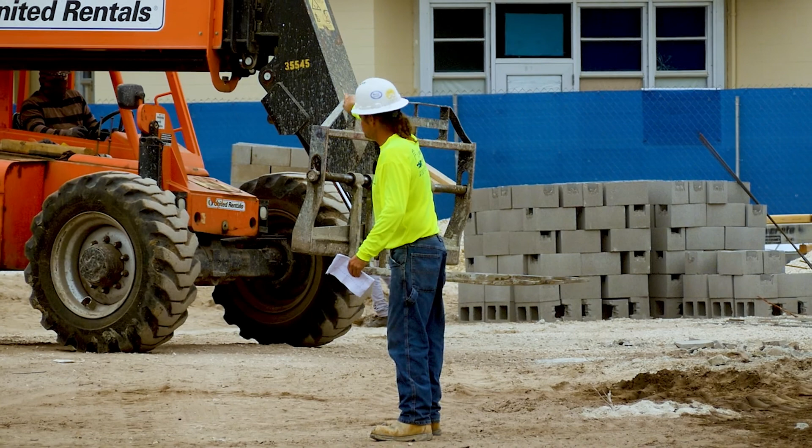Let me tell you about Osteen Brothers. My brother and I started when I was 15, he was 16. I was in 10th grade in high school, and my brother was in 11th grade. Family history of being in the construction business - my dad's first cousin had a big contracting business in Daytona Beach, Florida, and my brother-in-law had a contracting business here in Gainesville. I didn't have a license yet, just a learner's permit, and my brother had a driver's license. He drove the truck and I ran the little backhoe, and we loaded trash on the trucks. We went from there to start clearing lots and putting fill dirt in the foundations, and that was December 16th of 1972.

The Osteen brothers have started the land clearing, grading, and demolition on the new Chiefland Middle and High School project. They're able to do this with help from the Beard Technology Solutions team.

Osteen Brothers and myself started in 1983 when I hired on with Highland Tractor, which was the John Deere dealer for our area of Florida. I had the entire county of Alachua, and they were one of the prime accounts. Obviously I spent a lot of time with the Osteen Brothers over the years, and it kind of developed into almost an extended family relationship.

When we first became a Leica dealer for the state of Florida, we did a demonstration on one of their big job sites with Osteen Brothers. They came in and said, we want to earn your business and we want to demonstrate to you what Leica can do for you. They did that on that job, and the demonstration turned out really good. They were really impressed, so they bought initially one system - the first machine is the one they brought out to demo - and then after that we converted our whole system. Now their whole fleet is like machine control.

4 robotic stations, 2 normal base stations. They have up to 7 or 8 machines with machine control on them. The grade rods, your rovers, they're pretty much all Leica. They've told me they can do 3 major jobs at the same time with all their different setups. My feedback's always been from the field that it's easier to learn and easier to set up and to use, and once the operators become just slightly familiar with it, it just becomes like riding a bike after a while.

Let me embellish a little bit on that. We were using the Topcon products, and Highland Tractor came along with Leica products and wanted to demo to us. They brought that out there on a 650 dozer, one we still have today. That was in 2015, early 2015. We started using it and found out that with the Leica product, the GPS was accurate enough that we weren't having to use a laser correction or a robotic total station to meet tolerance of our grades. So we upgraded our whole complete system to Leica.

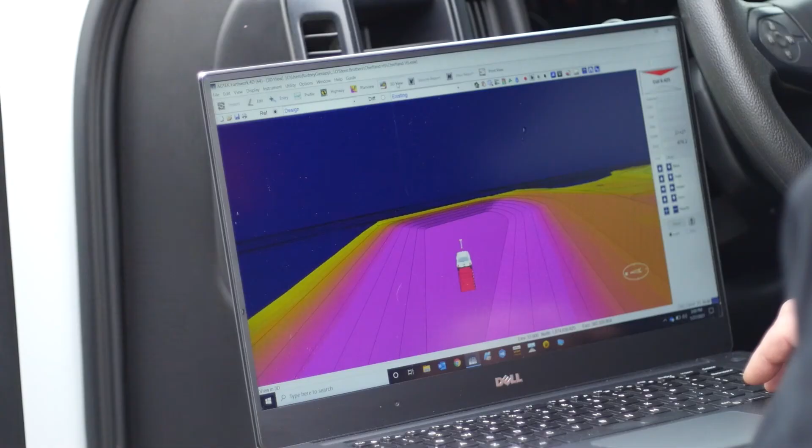The production has been the main thing with machine control. It eliminates some of your grade checkers. You can go into a site, not stake anything, and do your mass grading.

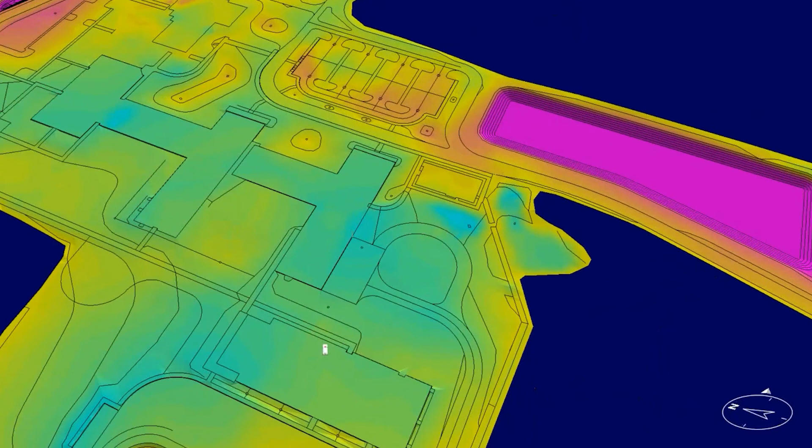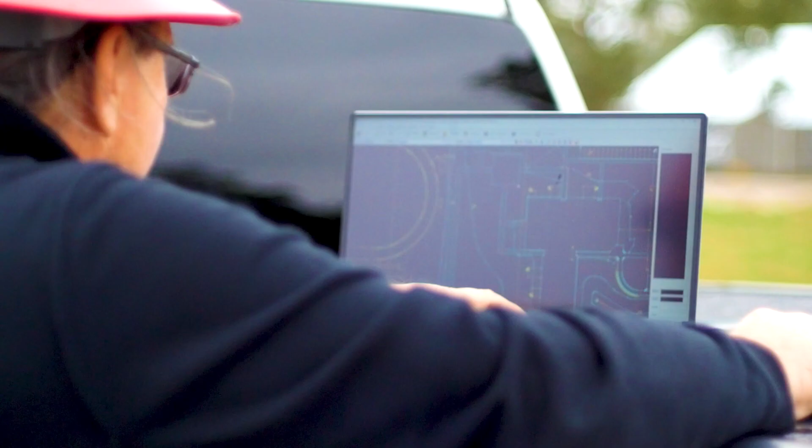The value of using technology extends throughout the entire life cycle of a construction site. Agtek, which is tightly integrated with Leica Geosystems machine control systems, offers dirt-simple solutions for accurate takeoff and estimate construction quantities, modeling grade and other construction processes, and measuring progress throughout the construction life cycle. Beard Equipment uses Agtek software to build 3D GPS-grade control models for Osteen Brothers. We have increased our production with the software and 3D modeling with a lot less manpower, so that allows you to bid your jobs a little tighter and produce a lot more.

Working with Beard Equipment has been excellent, actually very good. In the beginning, when we started with Beard Equipment, it was a learning curve - the Leica system was much different than what we were used to. But once we got accustomed to the system, our surveyors now enjoy it. They're always right Johnny on the spot. We'll call them and answer the question via phone, and usually within hours, someone will be on the job site to give us technical support and help us through our difficulties.

We have a utility crew behind me and we have a site crew behind me. We have different concrete crews. The only thing we use for the concrete crews in the way of robotics is layout. We use robotics only for layout.

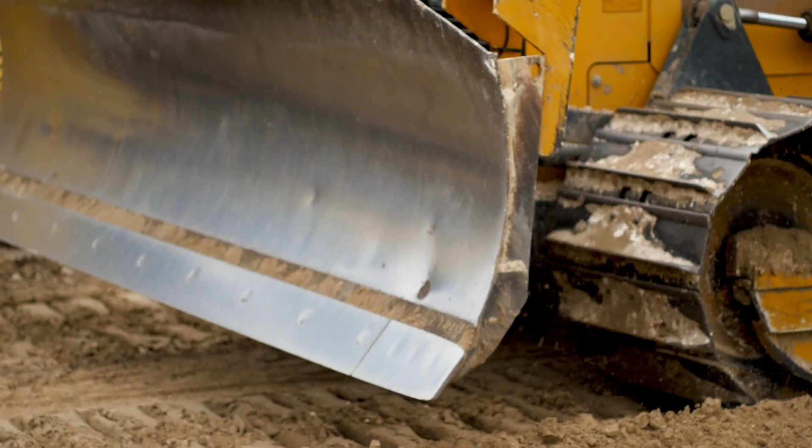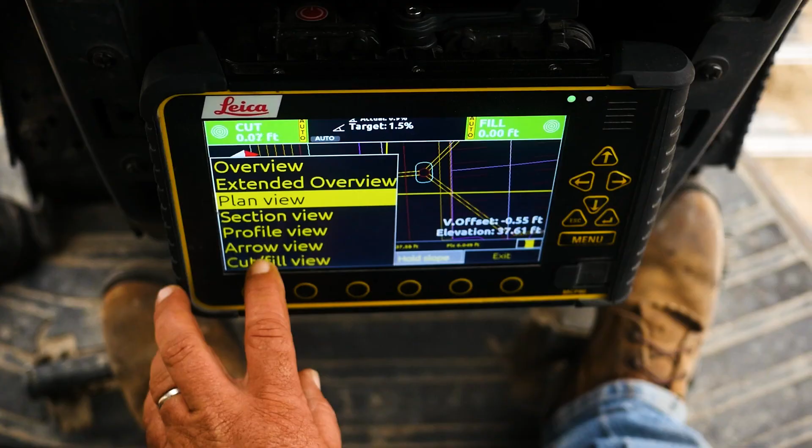The process is, I would call Beard, tell them what job we need to create a file for, a 3D model, send them the plans, they send back a 3D model, we load it into the machines, then that's it. Otherwise, it would take me about 4 or 5 hours of calculating each individual segment of a project, which could save 20, 30, 50 hours, depending on the job size.

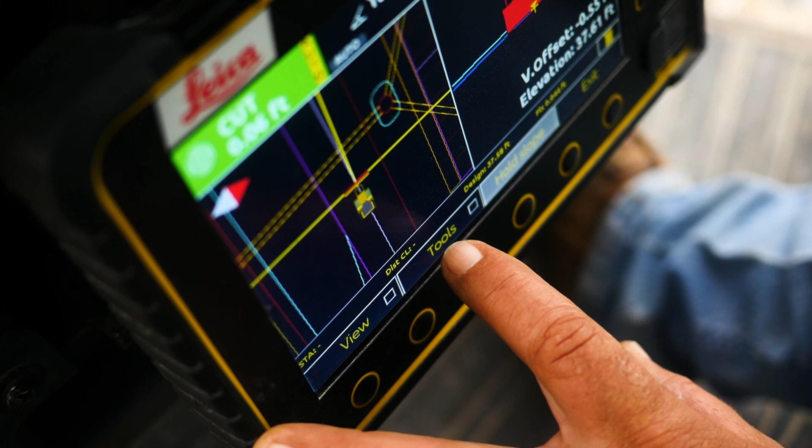Some of the old school guys are stuck in their ways and don't like it, but after we show them and it works and they see it makes their job a lot easier, they can stay in the AC in their cab.

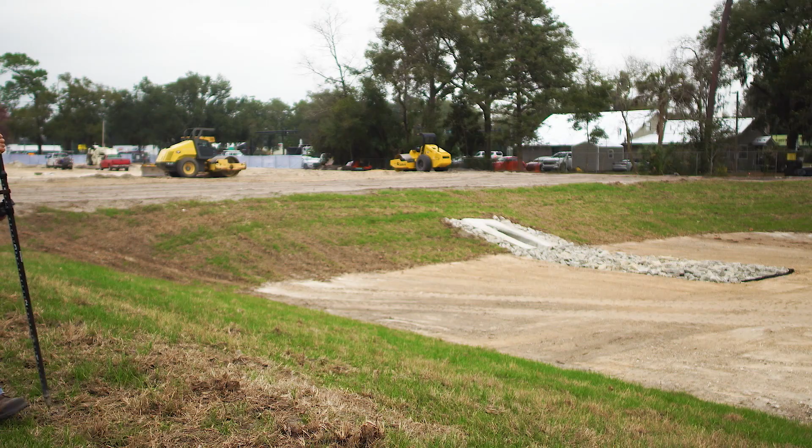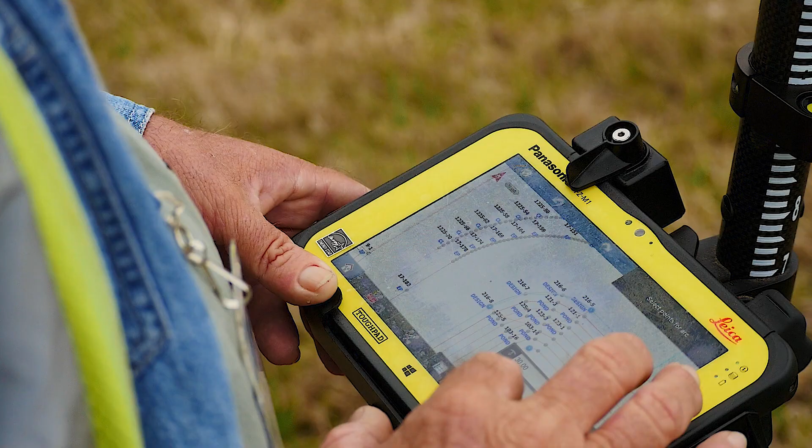We can make adjustments on the fly in the field a lot quicker now, because if we're setting a grade on an inlet and we got the wrong elevation, we can use the equipment, send it to Beard through Leica software, which before would take a day or two to do. Now we can do it in a matter of minutes. We're so used to the system and so dependent upon it, that if we lost it, it would probably put a 75% reduction in productivity. It's that important to us.

I think the Osteen Brothers and Beard Equipment are very tight, where the future always will involve the two of them. I'm not going to say we'll get 100% of Osteen's business, but I'd say we'd be in for the majority of their business for many years to come.

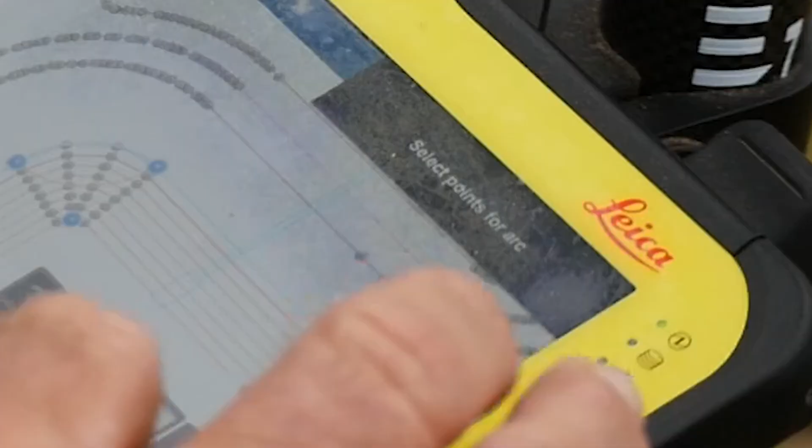Well, Beard will always be part of our experience, as they've always been there. If we had a problem with one of our Leica pieces, they've always been able to give us a loaner till they could get us up and going and keep us rolling. They're close by, so we're not having much downtime, and they just helped any way they could.